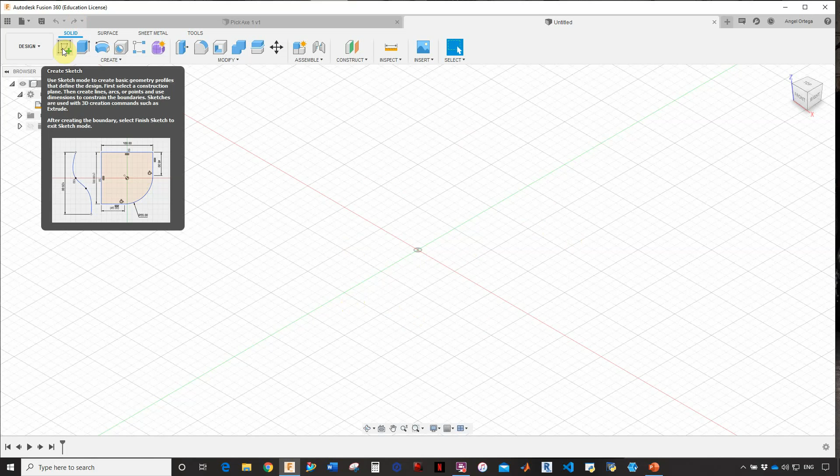Now I have 3 different planes that I can use. Here we see this red line. Red is going to depict the x-axis, and then we have this green line. The green is going to depict the y, and then the blue line is going to depict the z.

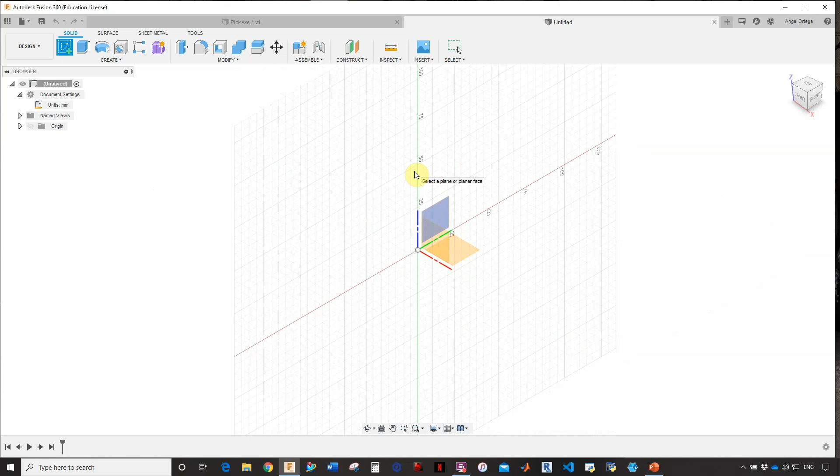Now your Fusion might look a little bit different than this, just given the preferences on the setup that you want. In my case, this is how I set up my Fusion, but it's all the same really. So here we have the XY plane depicted in blue, and then the YZ plane, and then the XZ plane. These are the 3 main planes that I can use.

So I always like to start sort of on the ground and then build my way up. Now here we just created a sketch, but there's really nothing there, right? Now the one clue I'm going to give you, a hint if you will, on how to always get started is, first things first, understand what you're trying to build and how to build it.

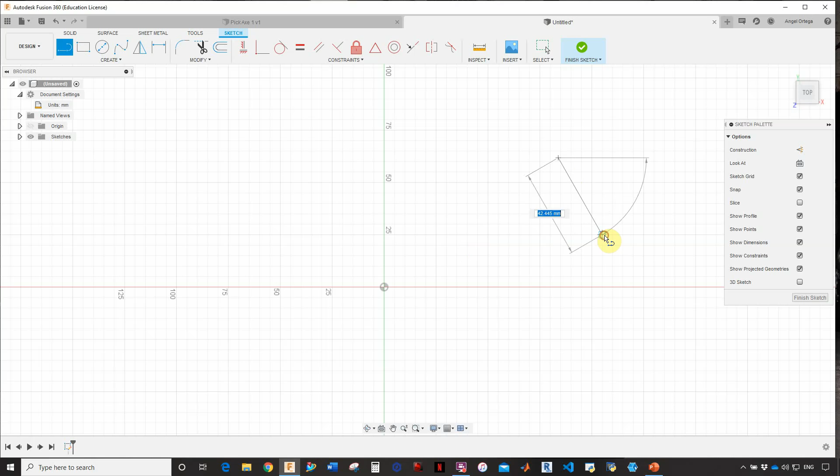Always think of simple shapes. In this case we have things like lines, and then we have things like circles, and then we have things like rectangles. So all of these things are simple shapes that we can create in 2D to be able to eventually convert into a 3D component.

Now the way you saw me build these three things, you don't really see it, but I'm hitting specific keys on my keyboard as shortcuts.

Now we also have all of those up here. So in this case, if I open up the create menu, you'll see that we have lines. I can create a line, and the letter you see there is the actual shortcut you'd type on your keyboard to go into that mode. If I type L on my keyboard, notice how my cursor changes that little icon, and I'm now in line mode. Anytime you want to stop building, just hit escape on your keyboard, and that's going to let you exit that mode. So again, line is L.

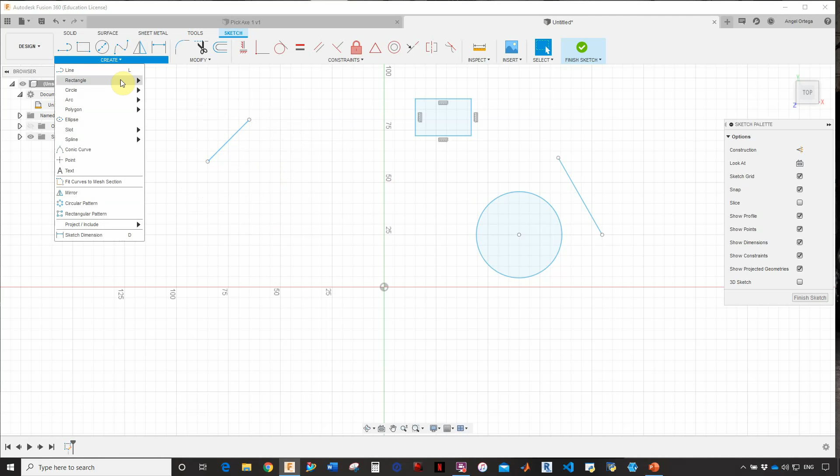For circle, it's also pretty intuitive. Circle is C on your keyboard. So just type C, you go into circle mode, click, click, and then you've just created a circle.

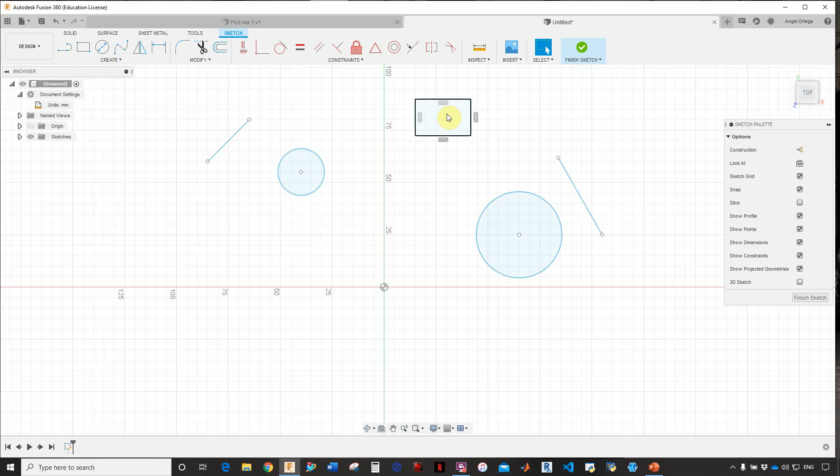So like I was saying, this is a circle, so type C on your keyboard. And then finally for rectangle, again pretty intuitive, you can go to rectangle, you can type R, and you're now in rectangle mode. The reason I'm only showing you these three is because these are the three specific shapes that you're going to use for the most part.

Eventually you're also going to get to use different things like splines and polygon tools, but in this case we're going to start off with the basic stuff, and then we'll eventually build up to the harder, or simply more, tools for you to be able to use.

Now on top of these, there's another very important tool for drafting or drawing, called the trim tool. It's depicted here with a couple of scissors, and it does exactly what you think it does: it trims excess material, lines, or curves from a sketch.

Now before we go into the trim tool, I'm going to do something a little crazy here so we can see what's happening. If I were to use my trim tool and try to delete this line, the trim tool is only going to delete the section you click up until the next intersection. Notice how that line intersected this other horizontal line, so it only trimmed up until that point. Now if I were to do the same on the other side, it would trim all the way until this bottom horizontal line.

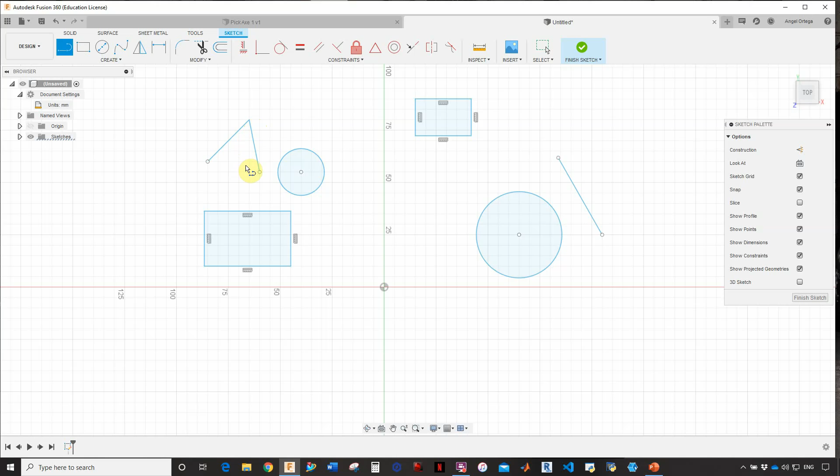Now in this case, a line doesn't really have any depth to it, it doesn't have an area, it's simply a line connecting two points. But if I were to create something like this, notice how it's now two lines, but because this corner and this corner are not closed, this is not a closed area. If I get pretty close, but not quite, it's still not a closed area, so I still cannot use this to create a solid. So this has to be closed with this other one. Now there are a couple of ways we can do that.

Probably one of the easiest ways is to simply use constraints, but I don't want to get too much into constraints just yet since that's coming in the next week or so. Instead, I'm going to do Control Z, and when I create this second or third line, I'll just make sure it starts at that corner and ends at that corner. Now we have a closed area. I think this is enough for you all to get started on Fusion.

Again, this is just an intro on how to get started with the bare minimum, and then we'll actually carry on with this in the assignments.

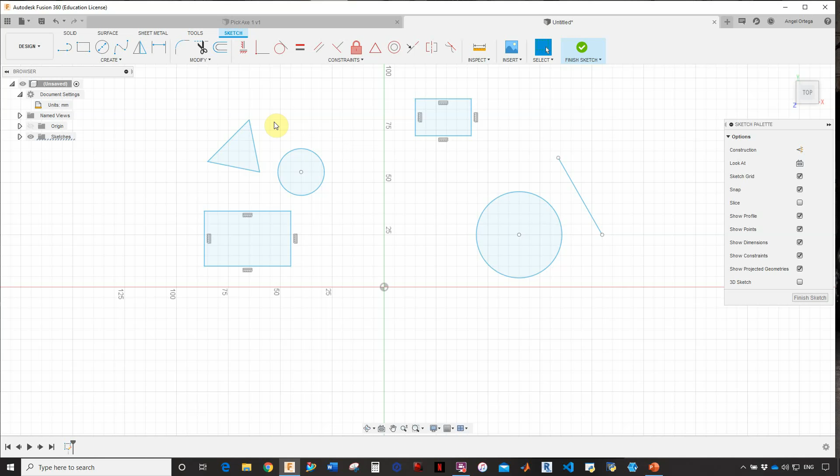Now the last thing I want to show you before we move forward is the only point of reference that we have in Fusion when we first start is the origin. In this case, this origin is the only thing that I can use to attach things to.

Now what I'm going to do is try to get used to always doing this when starting a new project or a new component. I'm going to hit L for a line, and then I'm going to start always at the origin and go to the right. Then I'm going to repeat the process, so L for a line, start at the origin and go straight up.

Now this line here is going to become my x-axis, while this line up here is going to become my y-axis. So now we're going to be able to use that as a reference for coordinate systems and things like that.

Now this line here, notice how it's a solid line, right? Solid lines in Fusion are used to actually build something. Now in this case, we don't want the x-axis to build anything, we only want to use it as a reference point. Same thing for the y.

So what I'm going to do is turn these two lines into this thing called a construction or a reference line. The way to do that is I can just select it, click on the line, it turns blue, and then I can hit construction. Notice how it turns from a solid into a dotted line. So anytime you see a dotted line, it simply means it's a construction or reference line.

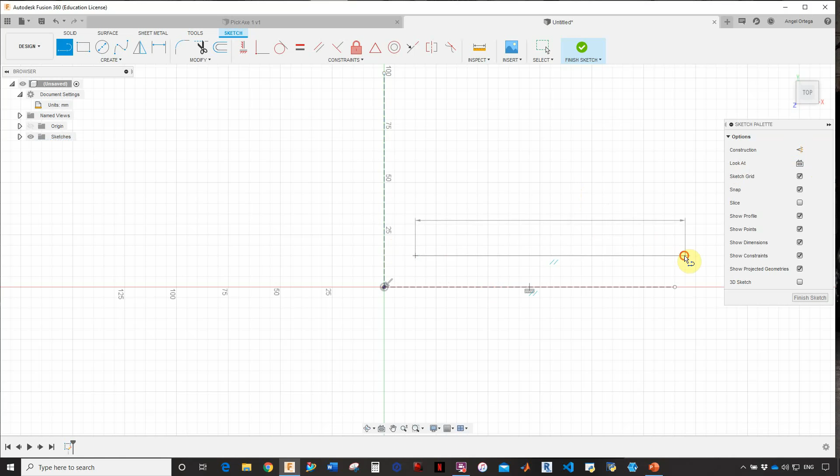Now there's a big difference between this line and this line. The difference between the two is this line here is depicted in black, while this one here is depicted in blue. Anytime you see blue in Fusion, it simply means that it's a line, curve, circle, whatever it might be, that is not fully constrained or fully defined. That means this line can still move in one shape or form, while this line can no longer move. It's set in space, it's defined as it is, it can no longer move. The only thing that can move in this line is the actual length, as you can see here, but that doesn't really bother us because this line is just a reference.

Now the way you get these things to actually fully constrain, fully define themselves is by adding constraints and adding dimensions, which we'll start covering little by little. So just look forward to that and understand those differences.

So here we have two main differences. One is color: black means it's fully defined, it's the final version, you can still modify it but it's set, it's defined, it cannot just move on its own. Blue simply means that it's not defined completely, it's missing something, something can still be adjusted or modified or move on its own. We don't want those movements or adjustments to happen on their own, we always want to have fully defined sketches.